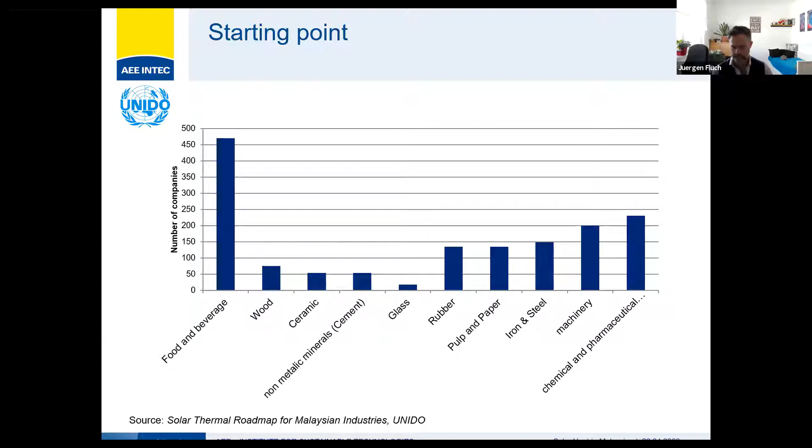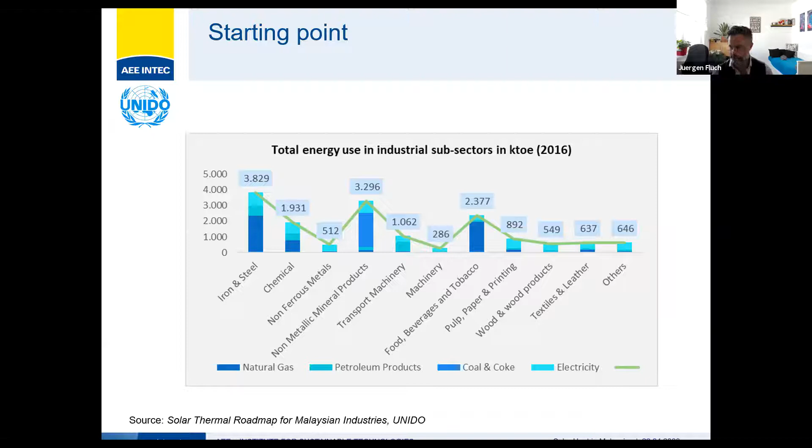Further looking at the energy demand in these sectors, you can have a lot of companies working in food and beverage, but if they are just very small companies, the potential is not that high. But this chart shows us that the energy demand in these sectors is really, really high. And the distribution between these different sectors is really comparable to what we have here in Europe, especially in Austria. So for us, it was really clear that the potential for solar process heat in Malaysia is really high.

And Malenia already showed you this outcome, and there was already one question in the chat: how did we come to these figures? So we had a closer look at the industry in Malaysia, identified based on this framework of solar process heat the real technical and also financial viable and feasible potential. And by this, we came up with 4,000 or almost 5,000 megawatt thermal to be supplied by solar thermal in Malaysia.

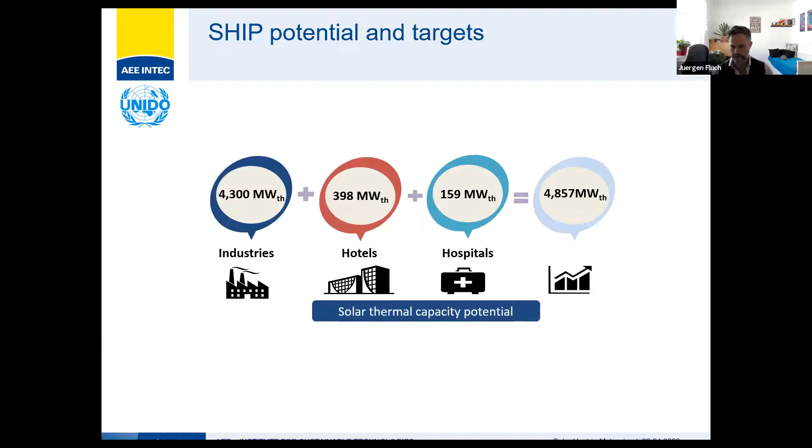In detail, out of this roadmap that is going to be deployed soon, we have in total a solar thermal capacity of almost 5,000 megawatts to be supplied with more than 1,300,000 square meters. So this means a huge investment, a huge saving of CO2, and a lot of green jobs that we create there.

And with these figures, you can go then to the government, to the policymakers, and you cannot do all this investment only with funding, but you have to create these framework conditions. So what is the field where investment can be done? These are, from my point of view, and I think also from UNIDO's point of view, really convincing figures. And so this is exactly what we are going to deploy with this roadmap very soon.

Okay, these are the figures, but how to achieve it without the solar community? I think for those interested in solar process heat, and you are, as you're attending this training course, if you're talking about solar with the industry and also policymakers, the first question you get is, okay, what is the electricity that I can get out of it? So this is a big misunderstanding that we have. Solar process heat is supplying heat and not electricity.

So you have to come up with a clear training setup, how to bring this knowledge to the community there. Malenia already said it, I will hop over it quickly. We had one-day awareness training events inviting policymakers and the top management of the industry, followed by two-day basic trainings where we gave more insights into what solar process heat can do.

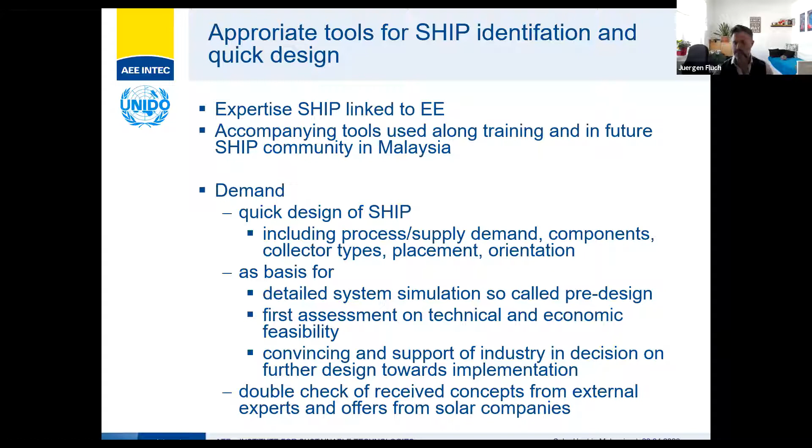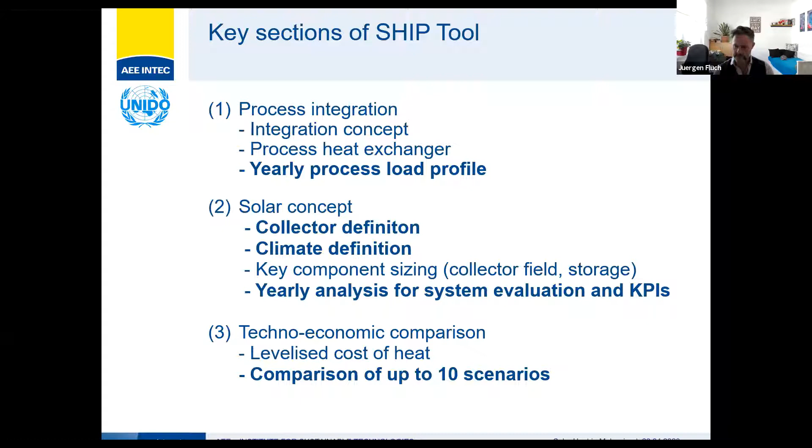The key sections: profile, collector definition, climate definition, component sizing, simulation, and very important at the end, coming up with clear techno-economic comparisons - not just saying this makes sense in terms of technical parameters, but that it's really worth the investment for the industry.

Some screenshots - standardized load profiles, so we can easily compare different concepts to each other, and easily compare different concepts from different companies also to each other.

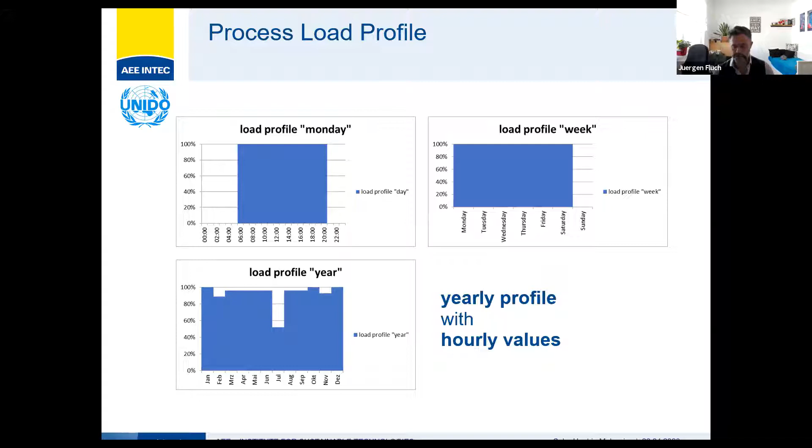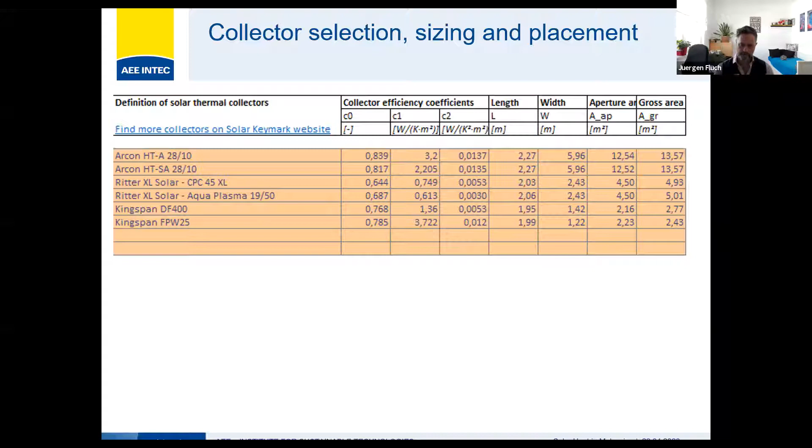So this gives us a very good basis for this standardized assessment, different possibilities to implement different collectors. We are completely open, everybody is allowed to use this tool to put in specific data for the collectors. Then we do a selection of the collectors within this tool, easy to use, with a lot of standardized automation in the background simulation. So it's not necessary to have a clear insight into the code we have in the background, just to use it and get a clear recommendation.

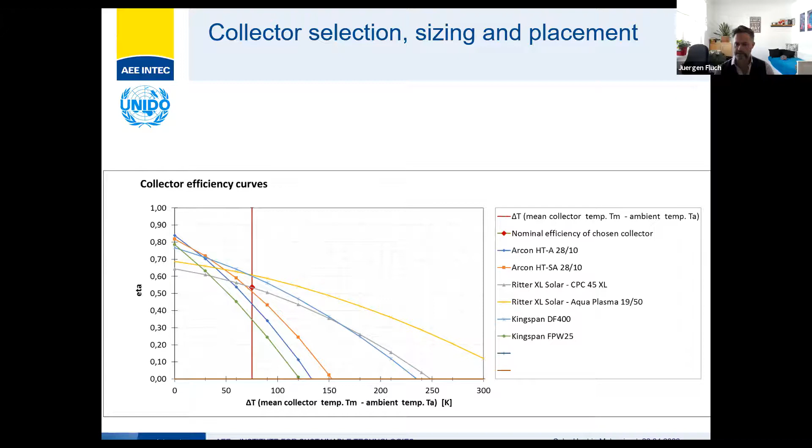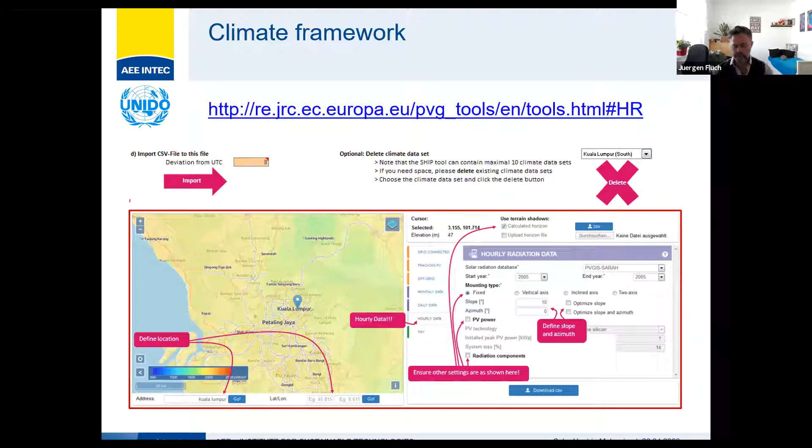Also, the data is very important. What is the solar radiation? What is the temperature? What is the wind that we are facing? What is the shading? Here we decided not to implement databases you have to pay for, but the European Commission provides a worldwide database where you can click on a point anywhere in the world and get information about the solar radiation there. You can click on it online, import it to our tool, and this is automatically done for the design of the whole system.

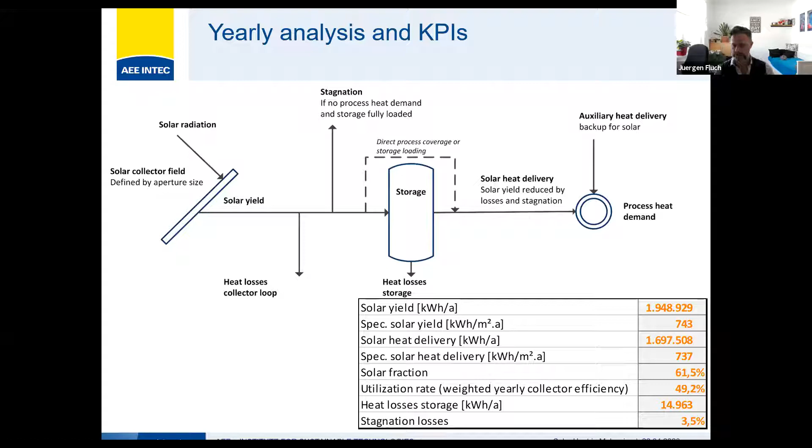It's not only about the collector, it's about stagnation you have to think about, some heat losses, the storage, heat exchangers, the integration point. All these calculations are automatically done. It's clearly reported how we do this calculation, and by this we want to achieve a kind of standardization for decision makers in the investments in the industry, but maybe then also for some external investors.

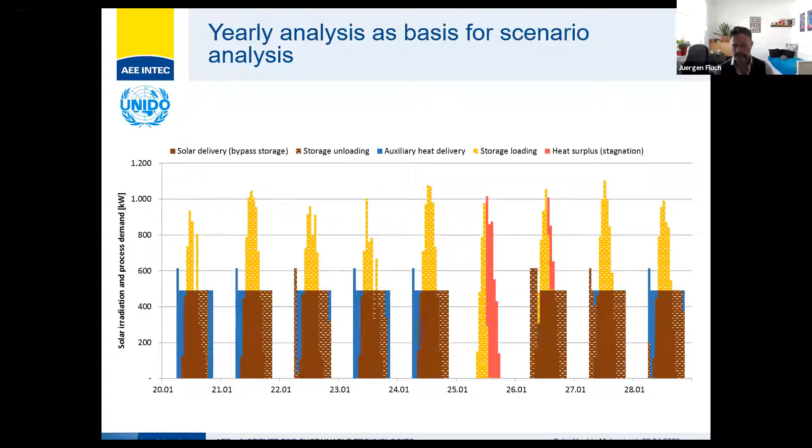That is very important. Some simulations, screenshots, how this looks like. You see when your storage is loaded, when the storage is unloaded, when you have to supply some backup system or thermal heat to the processes. This gives you a clearer idea about a yearly simulation, what is going on in your system, what can be optimized. With this, we are finally assessing these concepts.

Marlene has already told you we have achieved some implementations. All in all, we are not talking only about solar thermal process heat, we are also talking about energy efficiency. Within these training courses, we identified 95 single measures, boiler efficiency, some insulation parts that are not reported in the big projects. Marlene mentioned these 8 energy efficiency measures that are reported there, but doing insulation on a pipe, these are the low-hanging fruits we expect from the industry, but these helped the industry.

The investment procedure is clear. This is an offer right now within this project where UNIDO says, okay, we are going to support some investments up to 30%. This is just to push the front runners, to give them this cherry on the cake, to be the first ones to take the risk, because although we from Europe say this is state of the art and no technical risk is linked to solar process heat, if you're the first one in a country, you have to overcome this barrier.

And with this UNIDO funding, we identified now it's the perfect time to go for it. Also our tool is used for this standardized assessment. If somebody is asking for money from the task force, where all these stakeholders are involved, they can clearly rely on this methodology, and then it's easier to decide whether we think it's a well-done project or not.

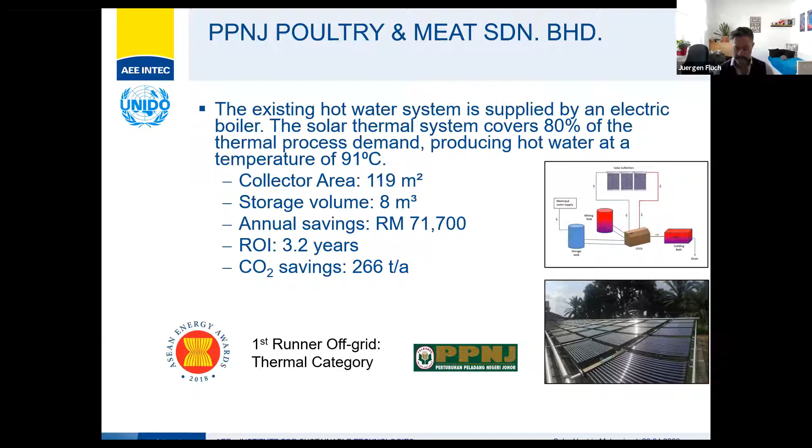So we have to create kind of investment schemes, and what we presented there is a Horizon project that has just finished. It's called TrustEE, about how to reduce the risk for the investors and also for the industry finally.

So we presented this approach to the financing sector in Malaysia and to the banks there, and also already to the government. There will be some financial workshops in the upcoming months where we try to show them possibilities how to overcome these barriers and reservations from the industry and the investors.

One possibility is a kind of standardized project assessment, so you have all these stakeholders on board - the industry, the suppliers. It shall not be only the Chinese ones, we really invite European suppliers to be part of this.

It's totally clear that 120 square meters is not that interesting, but we have some concepts on the table looking for 2,000 square meters. So I think this could be a point where European suppliers might be interested, and then we take the investors on board.

So this is an approach standardized on a platform. You have to provide some information in the background. We have biogas, biomass, and also energy efficiency, but for solar thermal, detailed simulations are performed in the background and compared to what the proposer of this project is expecting.

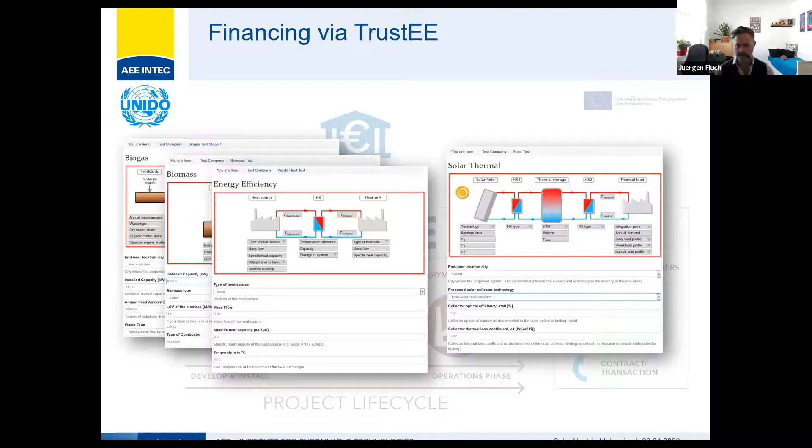And by this, we can say this is a bankable project, and they get our stamp on it. This is one possibility with which we think the government, the policymakers, the decision makers have to be supported, in order to not have to be an expert in all these small details, but just get a feeling if a project is well done and a revenue can be expected out of it.

Outlook for Malaysia: now we have to overcome this phase. I'm quite optimistic that this can be done. What will be done in the upcoming months is that this roadmap will be deployed.

As Marlene already said, we plan to do it right now this week. Both of us would have been in Malaysia right now, but now we are sitting in our home office here in Austria. But we're looking forward to going to Malaysia to present it there, to convince the decision makers, to convince the policies and the government.

Very important is to have certified experts. I think this is the same worldwide. We just have to ensure that the ones who are going to develop these concepts presented to the management of the industry, but also, and this is the key, to be presented to the investors, they have to be somehow certified. A big success of this UNIDO project is that the government accepted this certification procedure - if they have done this training and passed the exam, they are allowed to get the certificate and design these concepts.

We have to establish front runners till the end of this project to ensure that we are not leaving Malaysia at the end of this UNIDO project, but at this moment we have established the solar community with which we are pretty sure that in the upcoming 5 years we are able to achieve these results. And TrustEE could be one possibility to go for it.